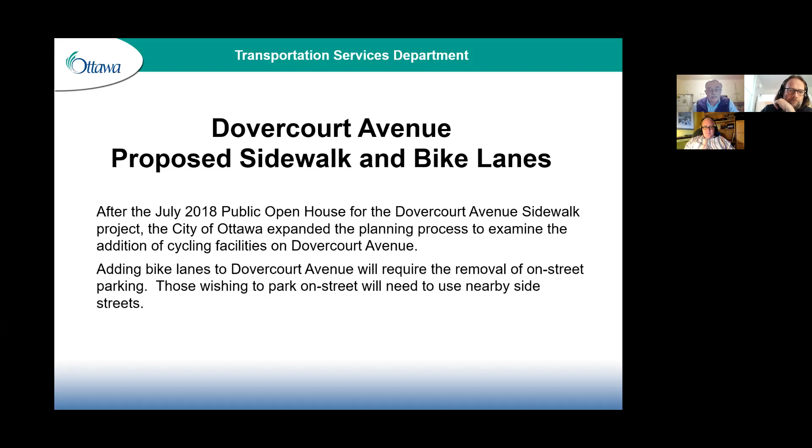The Dovercourt sidewalk is actually a phase 1 project in the council-approved 2013 Ottawa Pedestrian Plan, and it aligns with overarching city policy goals to maximize walkability along with the whole concept of sustainable transportation. We have a policy indicating that collector roads require sidewalks on both sides, so Dovercourt being a collector street is the reason why that project was identified quite some time ago. If anyone's interested in the pedestrian plan, it's available at ottawa.ca.

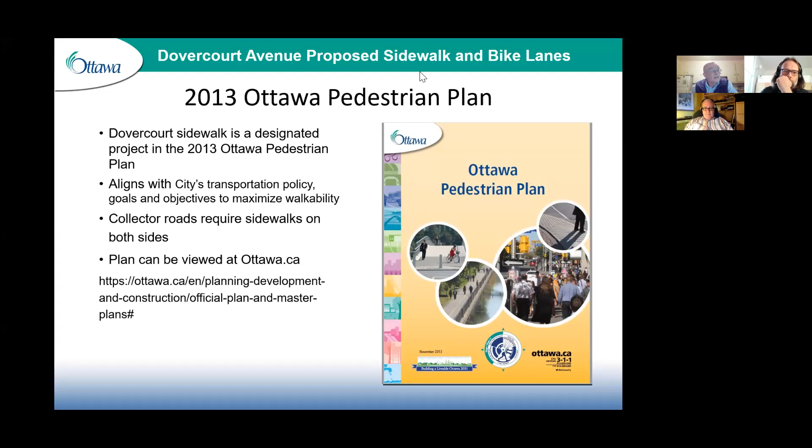It's also a phase 1 cycling project in the Ottawa Cycling Plan identified earlier. In addition, the route is part of a neighborhood bikeway, a special category within the bicycle network. Having bicycle lanes along Dovercourt supports active transportation to schools and recreational facilities, and is also a route for commuter cyclists, as I'll show later. It's also an alternative to Carling Avenue, which is the designated cycling route, but as everyone knows, not very cycling friendly.

The new bike lanes will connect with bike lanes put in place in 2019, and will also connect at the eastern end to the cycle tracks on Churchill. So you can see we're building an interconnected cycling network. The bike lanes, as well as the sidewalks, are supported by the 30-kilometer designation that the neighborhood has as well. Again, the Ottawa Cycling Plan is available at ottawa.ca.

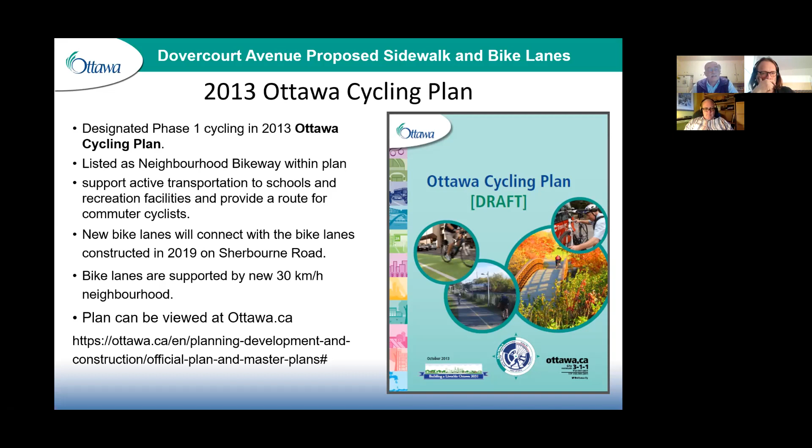This graphic shows the place of Dovercourt as part of this neighborhood bikeway, with the solid line in the middle being the section we're dealing with directly. But as you can see, it extends all the way westward to the multi-use pathway corridor along Pinecrest Creek. With the work Stage 2 is doing, we'll have a direct link to Lincoln Fields Station. At the eastern end, it extends all the way to Island Park Drive. This project leverages money the city's already spent improving the section eastward towards Island Park—it's all part of a longer corridor.

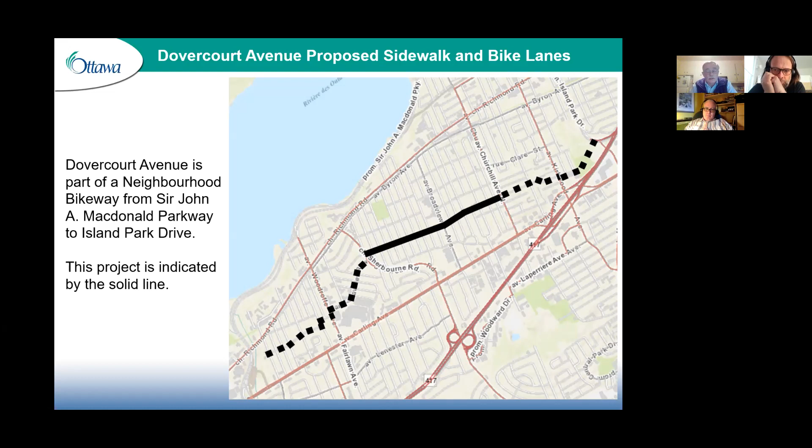I just wanted to highlight some of the existing facilities we're connecting to here. On the lower left side, we have the bicycle lane along Sherbourne, and the other photographs show various locations of the Churchill Avenue cycle tracks.

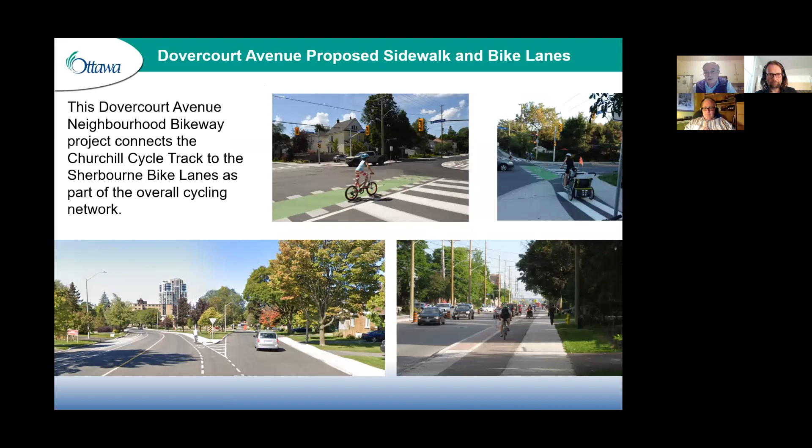At this point, I'm going to speak about the two separate portions of the project. The first portion replaces the earlier sidewalk you can see here, extending from Broadview to Churchill. It's very similar to what we discussed earlier, except bicycle lanes are added, and the actual sidewalk is a little bit further to the south as a result.

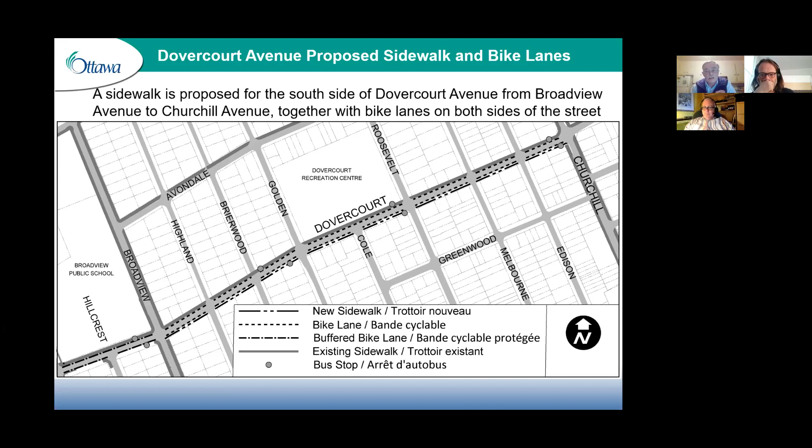Here's some construction details, again for the section between Broadview and Churchill Avenue. We're proposing a 1.5 meter wide bike lane in each direction, two vehicle lanes of 3.5 meters each, and a new sidewalk of 2.0 meters on the south side, which is a good standard for the city. I just wanted to mention that the 3.5 meter travel lane is the minimum width OC Transpo accepts for its buses, so that's what we're going with. The existing road width between curbs is approximately 11 meters, and keeping the curb on the north side where it is today, the new south side sidewalk would be located approximately 1.0 meter in front of the existing curb and 1.0 meter behind it, fully within the roadway right of way.

To reduce impacts to mature trees and utility poles, the sidewalk could be narrowed to 1.8 meters for short segments, or even down as low as 1.5 meters if necessary. However, details will be determined during the design that follows the field survey, once we move forward to the next stages.

Street trees will be protected during construction, and this includes pruning by qualified personnel prior to construction, and the use of hydrovac excavation, which was recommended by City Forestry to protect the tree roots during construction.

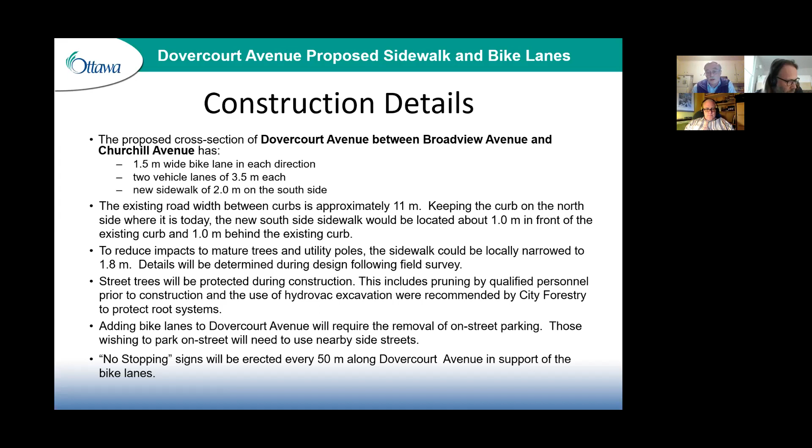These are some other features that we'll be including in the project, such as the tightening of corner radii at intersections, where the sidewalk goes in and we extend the sidewalk into the road, creating a narrowing at the intersection of the side streets, tightening the corner up. It shortens the crossing distance for pedestrians and makes it safer and a bit more comfortable. That type of work at corner radii tends to slow drivers down, increasing safety even more.

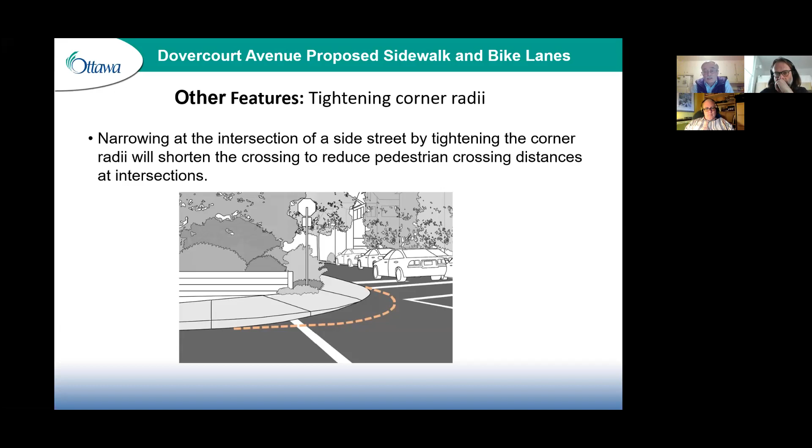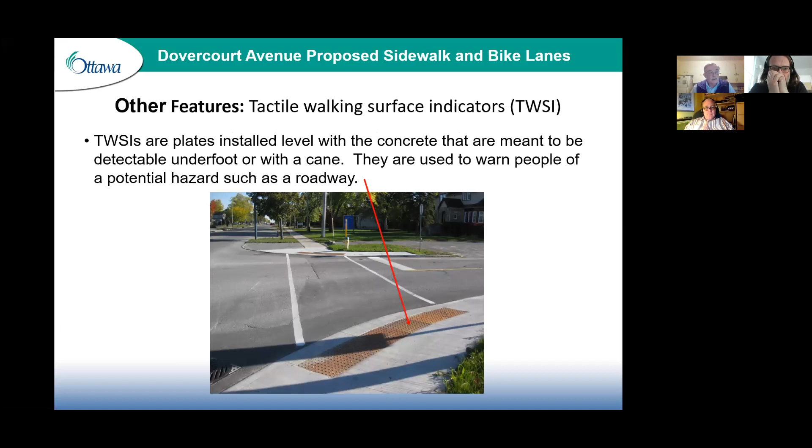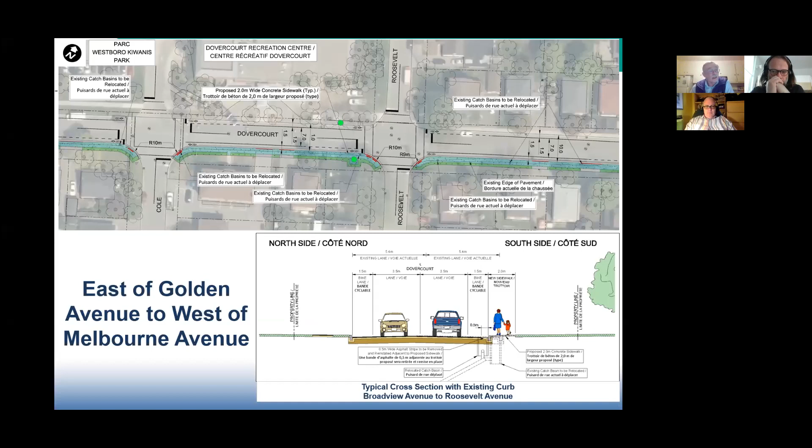Moving further west, now we're at the section east of Golden to west of Melbourne. It's the same kind of cross section here: sidewalk on the south side, bike lanes in both directions. Moving further west, now east of Highland to east of Golden, again it's a very similar cross section. Road width is all practically the same, so we've got the same sort of situation here.

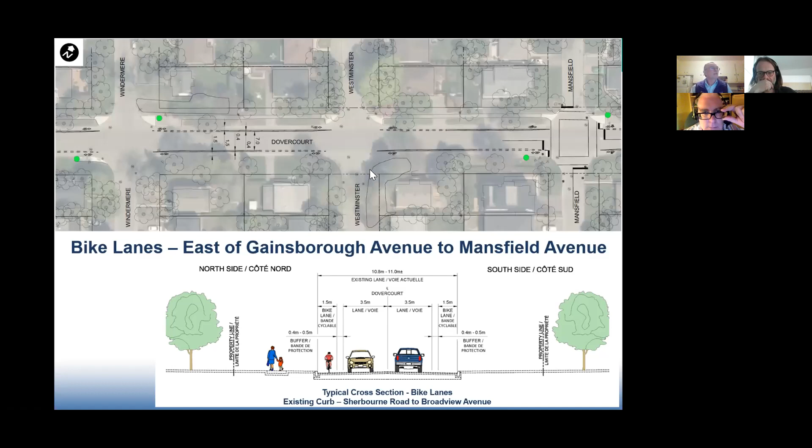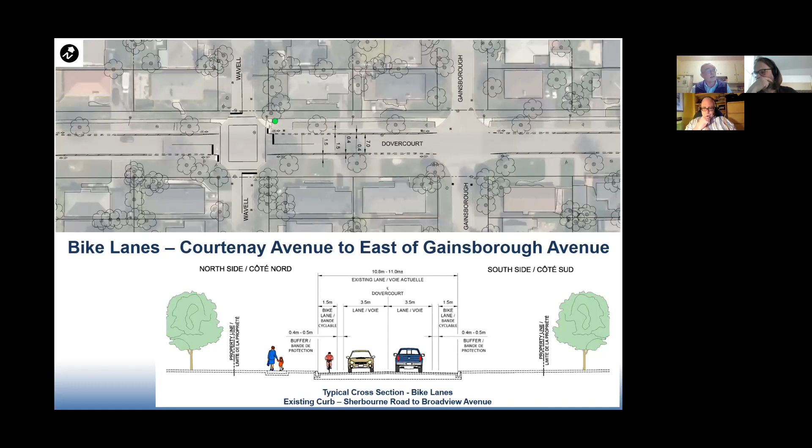Heading further west, you see the section between Courtenay Avenue and Gainsborough, where you can see the 0.4 meter buffers in the design. And finally, to the end at Sherbourne, where, as I mentioned, we already have bicycle lanes.

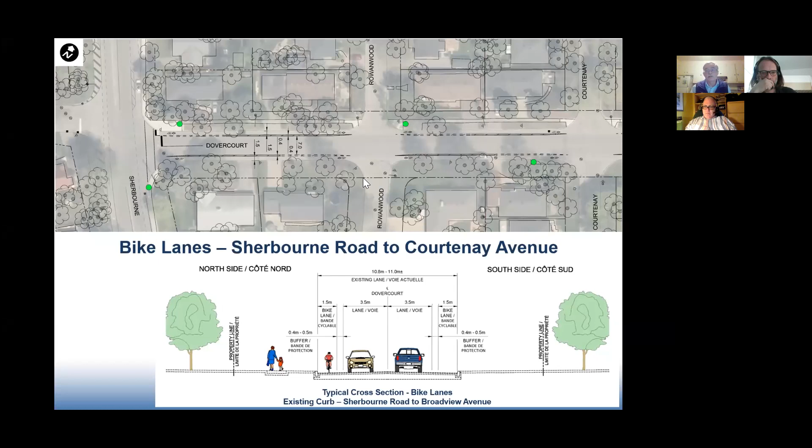The estimated timelines for the proposed project are 2021 for finalized approvals. We hope to have that done within a short time period so it can move directly into detailed design, and have the engineers start to look at this and make the design, then moving to construction in 2022, pending full funding.

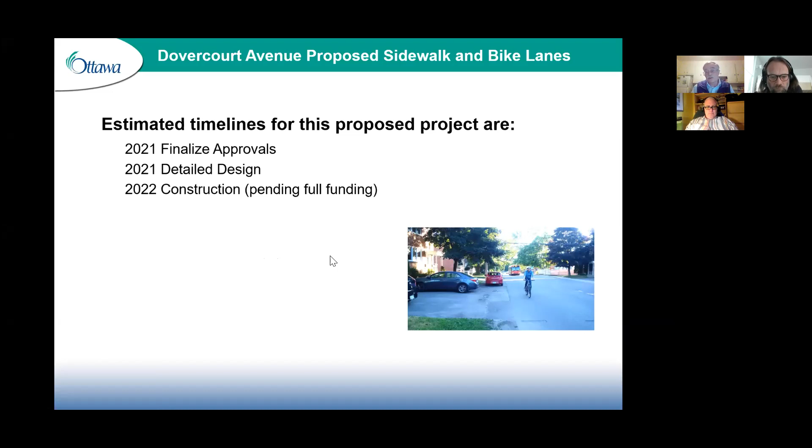We are currently a little bit short, but the chances are quite good that additional funding will come in. So we're anticipating 2022 construction, but if not, it would be 2023. The next steps are...

Please provide your comments to me by April 25th. My email address is there. The city will complete the project planning with consideration for all comments received. I'd like to thank you very much for your participation, and with that, I'll hand it over to Tom.

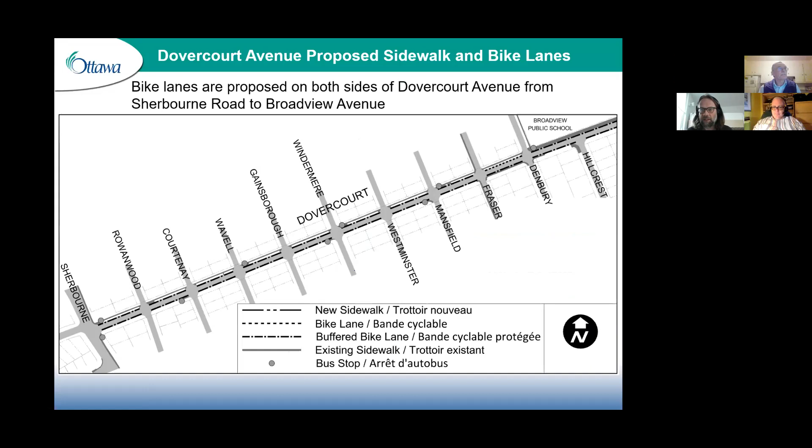Thanks, Tom. And I apologize if I missed this at some point in the presentation - I was listening and making dinner at the same time. But I have two quick questions. I'm a resident who lives on Dovercourt Ave. My first question is about the north side sidewalk, the existing sidewalk on Dovercourt. It's pretty rough in some places, and I wondered if there are any plans to do anything about the north side, or if it just stays as is while the new sidewalk goes on the south side.

My second question is about the on-street parking on Dovercourt. I understand the rationale and the no stopping signs, all of that, but does that hold true in the winter too? The reason I ask is both the sidewalk snow clearers and the regular snow clearing on Dovercourt go by very often during the winter time. Of course you need to clear the part that's at the end of the road, but then often we have to go out and clear the part created by the sidewalk pusher going by too. So I'm just wondering, do those parking restrictions stay in place all through the year?

I'll answer the second question first, as well as I can. I believe they would remain in effect, and until such time as this is added to Ottawa's winter cycling network, we would have to assume that the bike lanes are not winter maintained, so it should mean no change. But if it's added to the winter cycling network, there might be some changes.

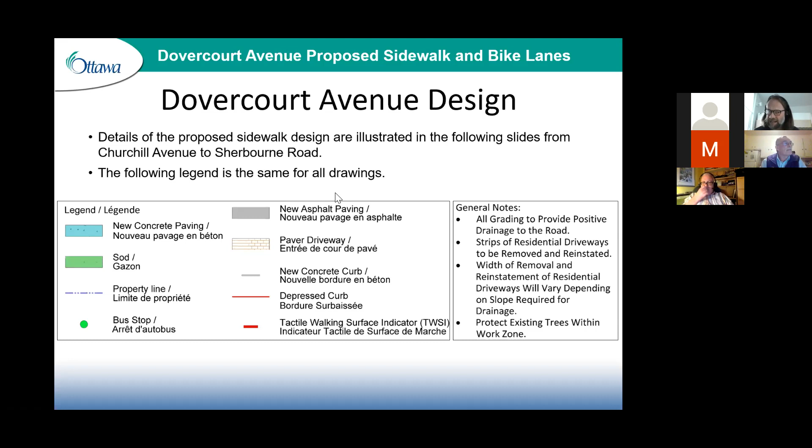So, the dynamics between the buses and cyclists in this stretch — I was mentioning before that the school buses tend to stop on Broadview, but the city buses have bus stops in front of the school, and the usual practice is to dash the lane, and those buses come in and drop off and pick up. They don't typically stay there for very long.

However, there are some special needs students at the school, and they have special types of vehicles that stop in front. So we're in discussion with the school about this, and we're going to try to work out some sort of compromise, but I can't say exactly what it is. It's one of those things that needs to come out further in the project, in the detailed design, when there's more time to work it out with traffic services, who are the ones who actually approve the pavement markings and regulations.

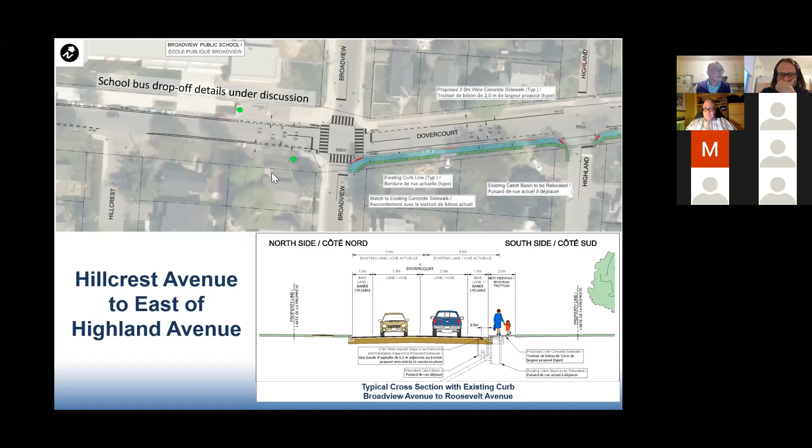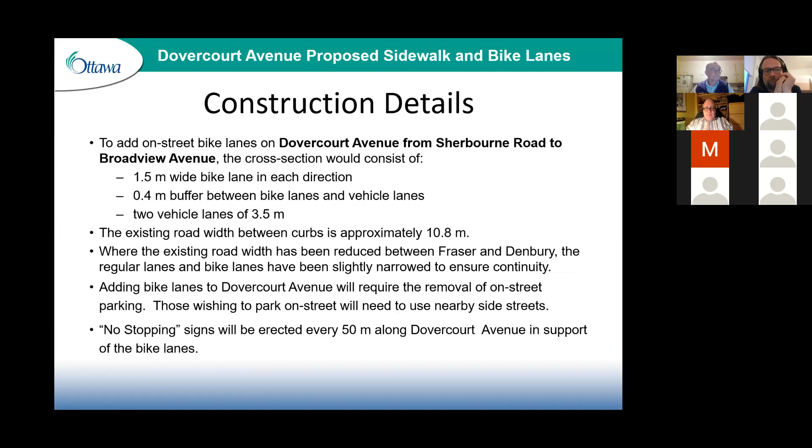I don't know, maybe Valerie has a thought on that. Perhaps, Robin, right at Golden and Dovercourt it would certainly depend. If you go over that way, the things that will make a difference are where the hydro poles are. If it's around the corner, you can see at some of the corners, like at Highland there on the screen, we've brought the sidewalk around the corner like we need to, to make sure people can cross the road properly. But I think you are absolutely right. We're only going to be on city property, not private property. In general, if this design looks okay in the end, it will be just about 1 meter or so of the city right of way that we'll be impacting.

Okay, thank you, Valerie. I'll point out that there are places where property owners have put things on the city right of way. So let's hope you know where the city right of way is at your location, because it can be a problem in some areas.

For sure, for sure. Miriam McNeil in the chat says, I'm very supportive of the project, happy to see it move forward. It will reduce speeding. Will the public have an opportunity to review the detailed design once it is available? And if street trees are removed, will they be replaced and or new ones added where it makes sense?

Normally with a project like this, the next stage, the engineering design leading to construction, usually involves additional consultation because more is known about the impacts. Since you've asked, I can put a note to that effect, because the project passes from our unit to Infrastructure Services, a different department, with a new project manager. I can make sure he knows about that issue.

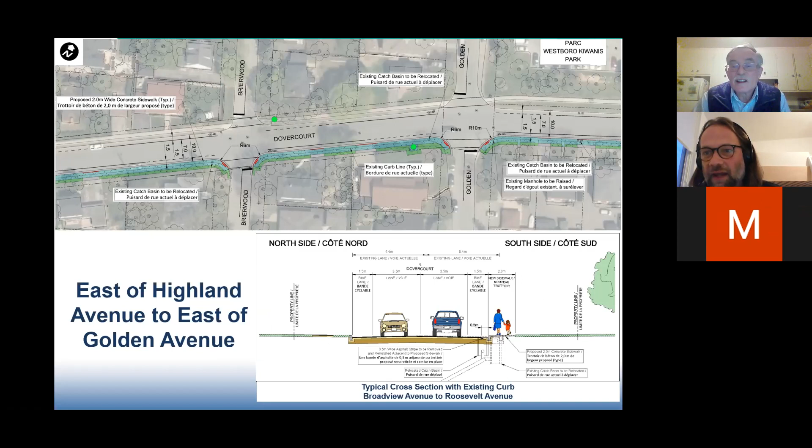Yeah, you got the mute on there. I'm just copying and pasting all the questions that were in the chat so that I have a record of those. Other than that, I think it all worked out pretty well. I have a button that says end for all, so I can do that in just a second and we'll be good to go.

Thanks very much, Tom. We'll talk to you again soon. You bet, have a good night. Good night, Rob, good night.